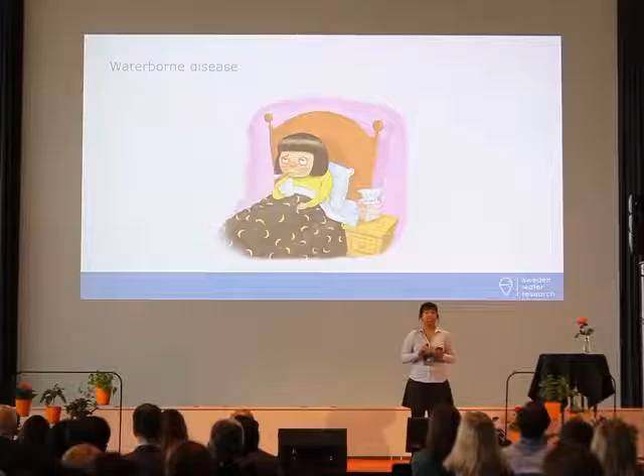And first thing, when I say I work with microbes, people think, wow, these are those things that make us sick. And when it comes to water, of course, waterborne diseases are one of the reasons why we should care about microbes in the water. I will give you 3 examples from different outbreak stories and see what we can learn from these 3 stories.

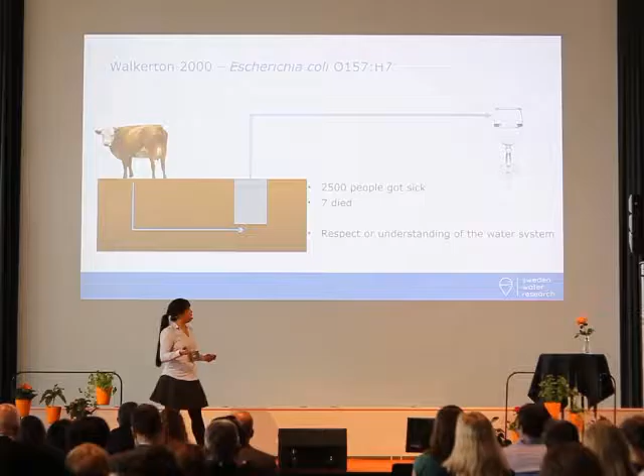The first one was in Walkerton, 2000. Walkerton is a city in Ontario, Canada, and had during this time around or less than 5,000 people living there. During this outbreak, 2,500 people got infected by this pathogen, and 7 people died. So what happened? How did the pathogen, in this case E. coli, EHEC, the pathogenic one, enter the drinking water system?

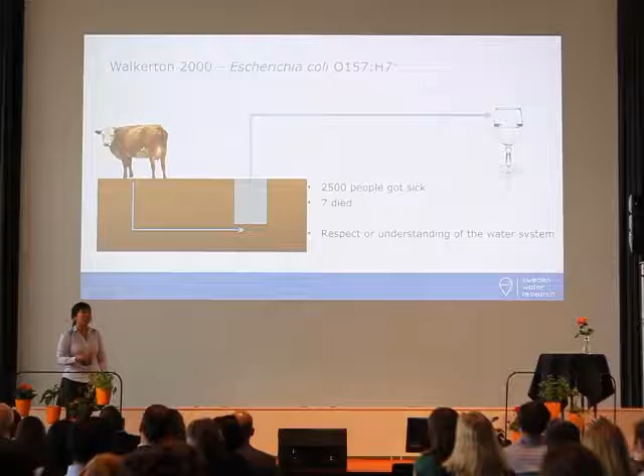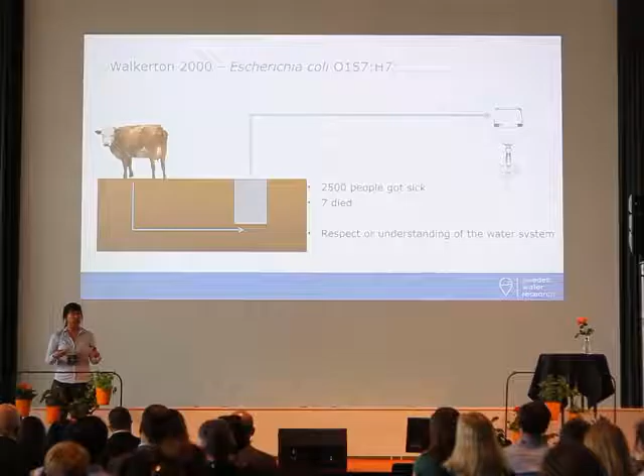So during this time, the contamination source came from a cattle farm. And it came due to a drinking water well that was located really close to this cattle farm. So the pathogen managed to enter the drinking water system by this well. It had already been reported since 1978 that this well, due to its location, was not suitable or should be monitored more closely for drinking water production.

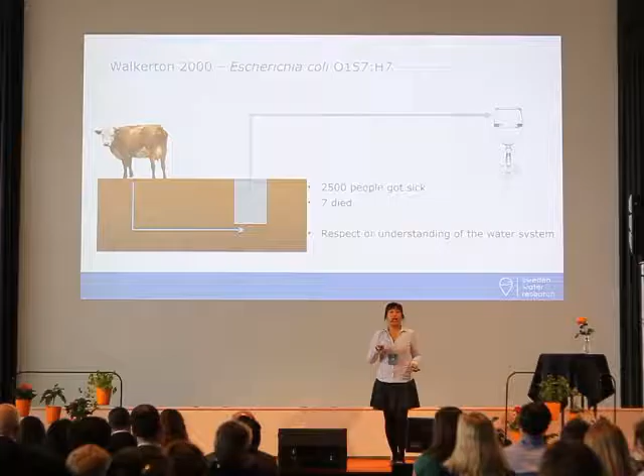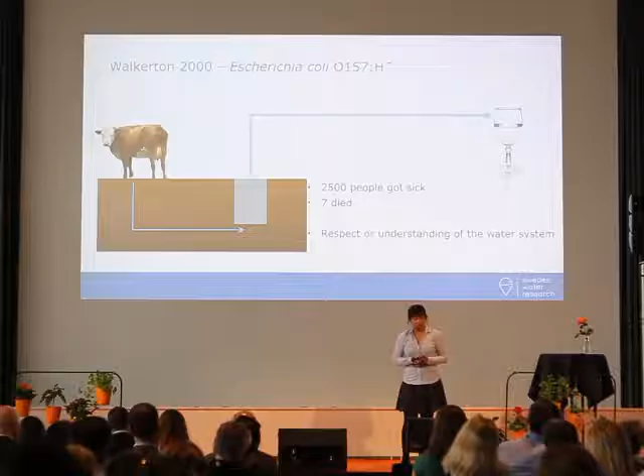Unfortunately, this was not followed, and this, in combination with the operators at the water supply not adding enough chlorine into the water, caused this outbreak. So this is really an example of how lack of respect and lack of understanding of our drinking water system can cause this huge consequence in a society, and also 7 people losing their lives.

It took 4 days from those phone calls before the government went out to recommend the citizens to boil their drinking water. And it took 4 more days before they were able to confirm that the pathogen, Cryptosporidium, had contaminated the source water and also all the drinking water in Östersund. Quite bad. And the government didn't remove the recommendation of boiling the water until 3 months after the outbreak. And that was after the installation of UV at the treatment plant and after a lot of flushing of the whole water system.

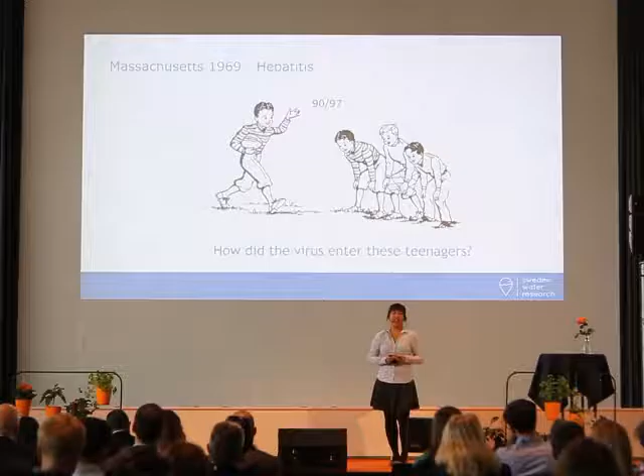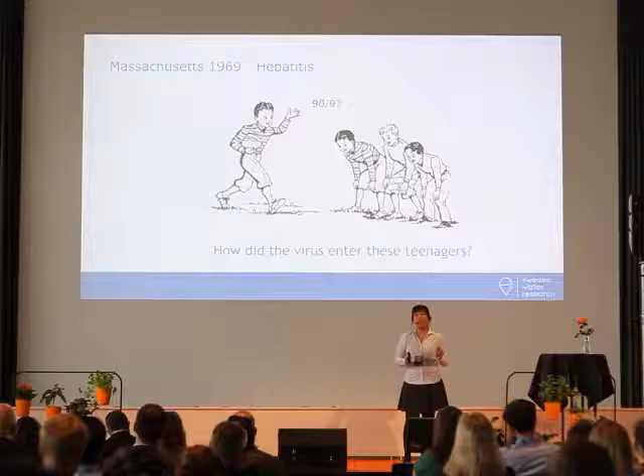My last story is quite interesting. It's almost like a detective's work. So in 1969, in a college in Massachusetts, 90 out of 97 football team members got infected by hepatitis.

They couldn't find any common source with other students on the campus, so they started to think it must be the training ground that is the contamination source. But how did this virus enter these teenagers by the training ground? That's really weird.

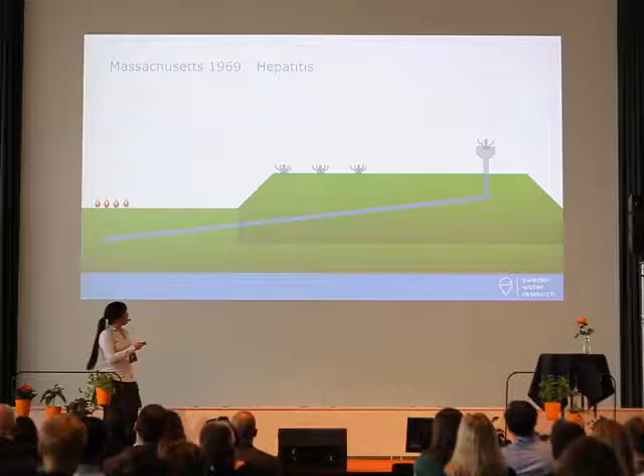This training ground was located at the top of the college area with a pipe system having its end there, with a drinking tap for the football team members. Along the way, we have some irrigation taps for the fields, and we also have a city down here. So what happened?

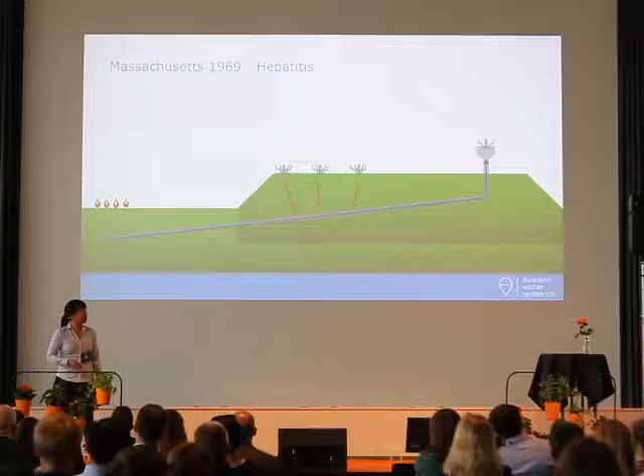It showed that some children with hepatitis had been playing close to the water from the irrigation taps, and almost during the same time, there had been a fire in the city.

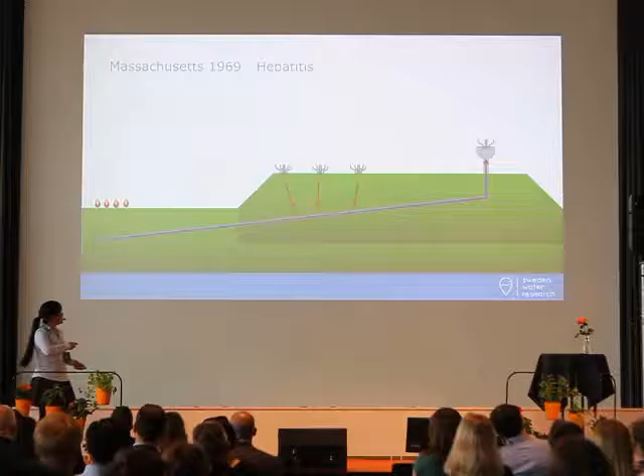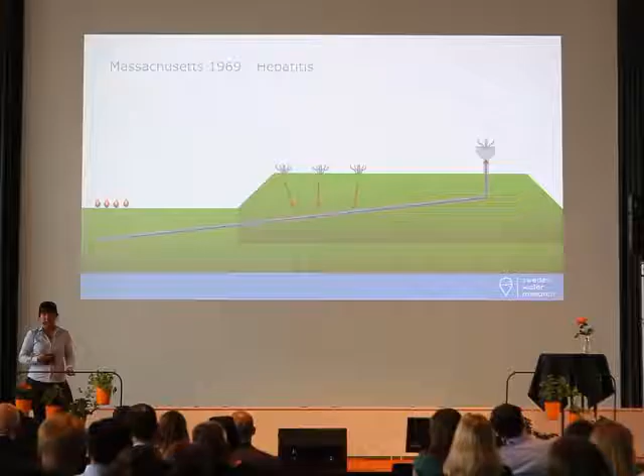This led to the conclusion that the children contaminated the water around these irrigation taps, and due to the fire, a negative pressure had built up in the pipe and drawn the contaminated water into the pipe system. So when the teenagers, the next day, had training and drank from the drinking water tap, the contaminated water had traveled to them in a very unfortunate way.

So these three examples show us how dangerous, how costly, and how complicated microbes can be in our drinking water.

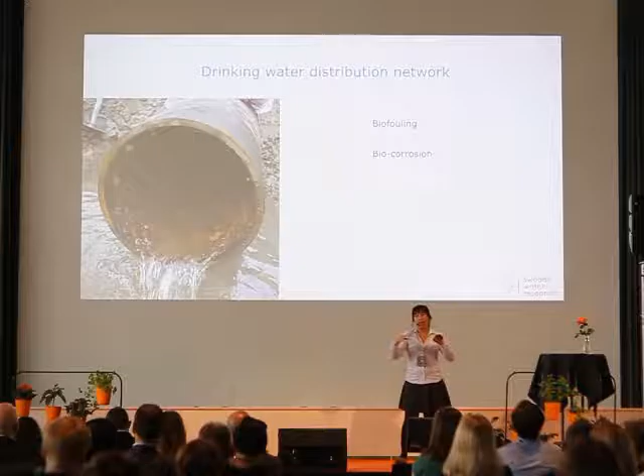But they can actually cause other kinds of problems too when it comes to drinking water. For example, in drinking water distribution networks, in pipes we have all kinds of microbes, and they can produce something called biofilm. It's a sticky material. We actually have that on our teeth when we wake up, before we brush our teeth. It can be a little bit sticky. That is biofilm. They can produce that in the pipe system too.

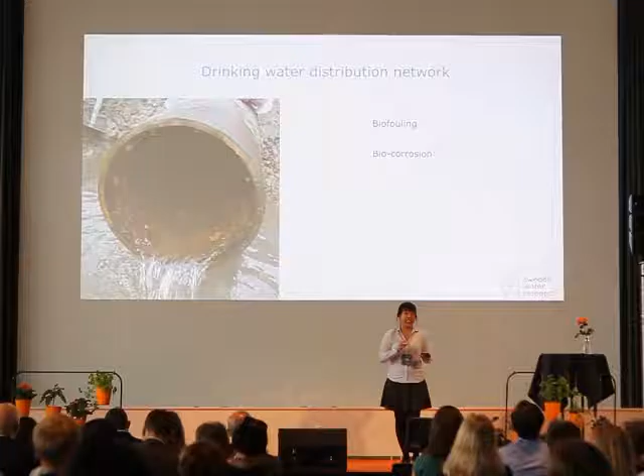And here, they can start to build a community and live and grow. They can grow so much that they can cause loss of flow rate, loss of pressure, and even clog the whole pipe. And some microbes in this biofilm, for example Ferrobacillus, can oxidize iron in the pipe material, causing it to leak.

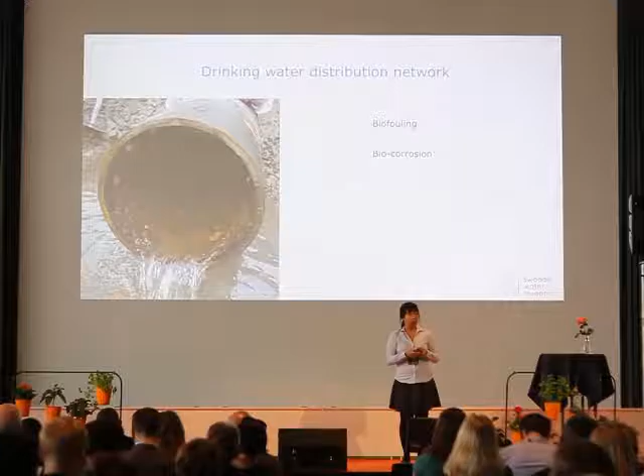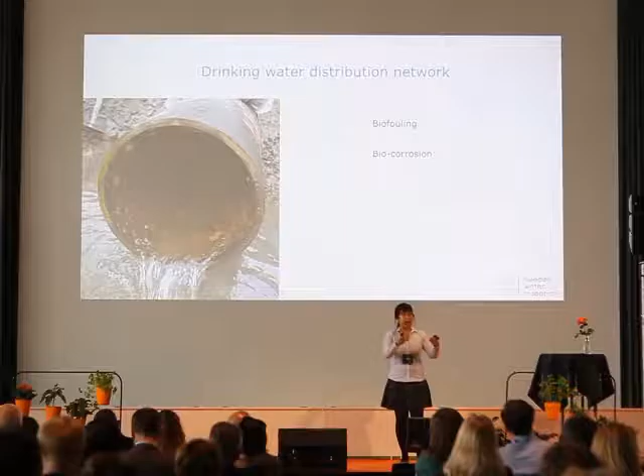There's also all kinds of microbes that can produce all kinds of acids. For example, sulfuric acid produced by bacteria called Acidithiobacillus can make the pipe leak. This costs a lot for society, to dig up the pipe and replace it. That's really complicated and costly.

So of course there's a reason for us to understand this world of microbes. Now I have been talking about the bad microbes in the water, the pathogens that can make us sick, and also the spoilage microbes that destroy our pipe system. But the majority of the inhabitants in the water are actually not pathogens, and they are not spoilage microbes. They are the so-called natural flora in our drinking water.

I will give you some numbers. For example, in a glass of water, we have around 1,000 to 100,000 bacteria per milliliter. In Lund, we have around 200,000 bacteria per milliliter, and that is quite a lot. That is around 40 million in a glass of water, which corresponds to almost all the people living in Spain, the country Spain, in a glass of water.

That is the world we are talking about. And when it comes to a distribution network, that is even more. On the pipe surface, we have around 100,000 to 100 million bacteria per square centimeter. That is a lot.

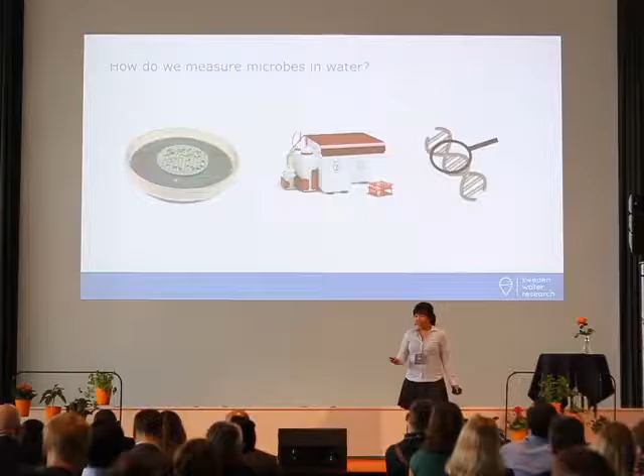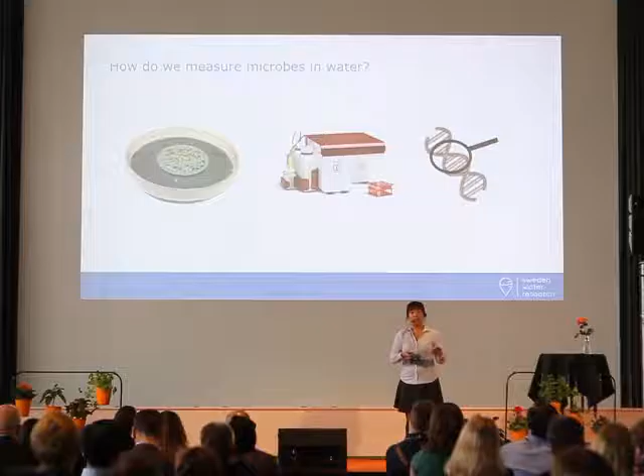I will give you three examples. This one is plate count. It's over 100 years old. You just add your water samples in there and let it grow for some days.

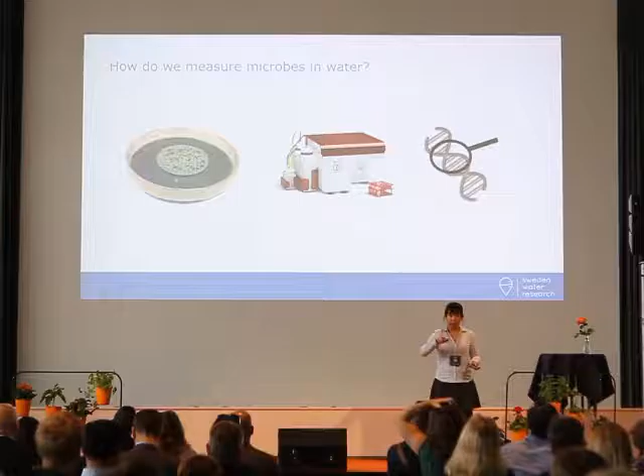A newer method called flow cytometry counts all the bacteria in your water based on DNA, no growing, just DNA. Then we have a third method, very modern and complicated, called next generation sequencing, where we sequence all the DNA in a sample to get the name of the whole flora.

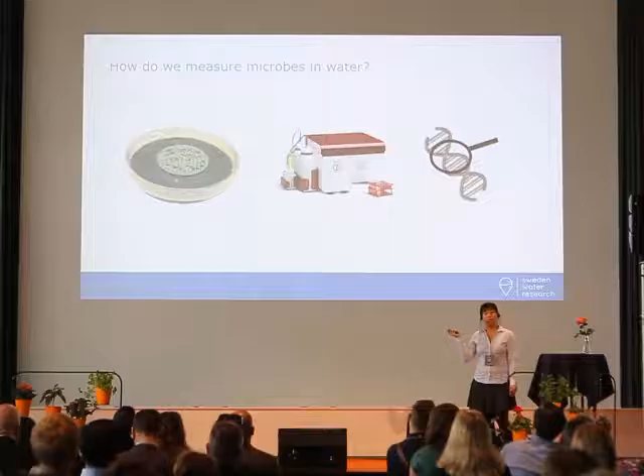Which method do you think all the regulations are based on? Yes, this is a leading question, but yes, plate count, the method that is over 100 years old.

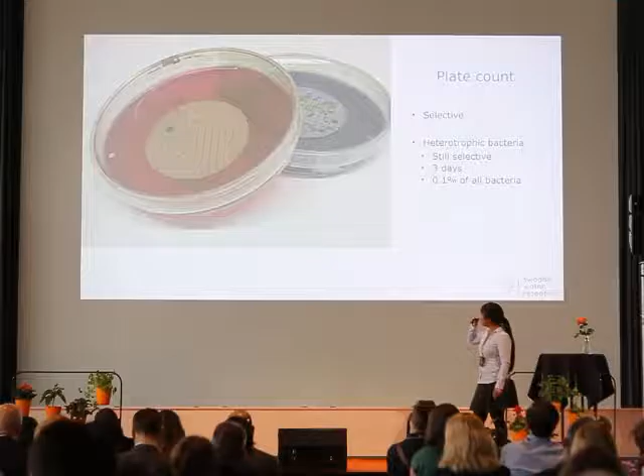Let's talk a little more about them. These plates are actually from my lab, also called MCF plates. Here we can grow and select E. coli and coliforms. The blue dot here is an E. coli, and the rest are coliforms.

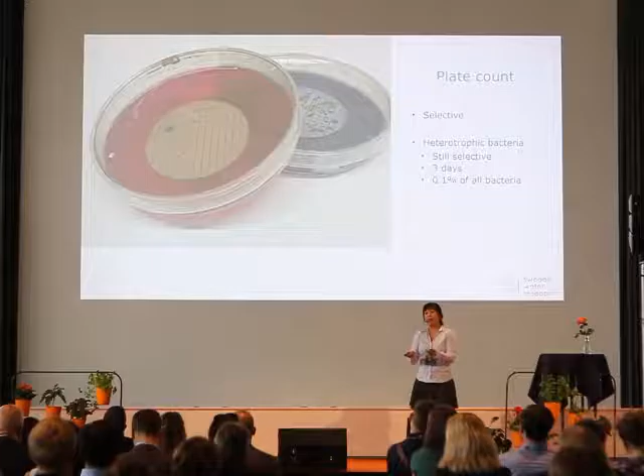So with this method, what you do is give food and nutrients to the group you're interested in following, then incubate it at a temperature they like, in this case 37 degrees, and then wait and count how many have grown from your sample.

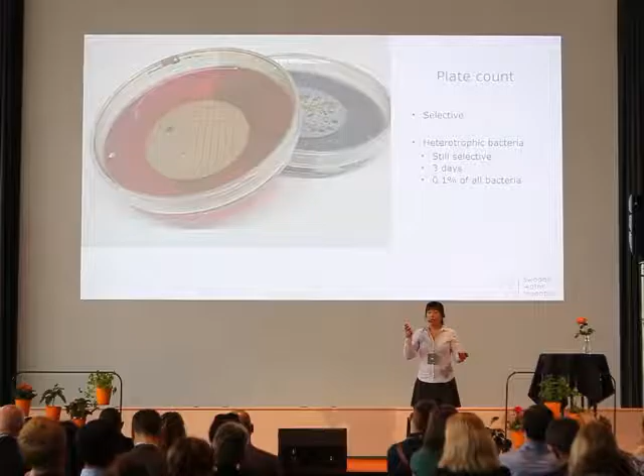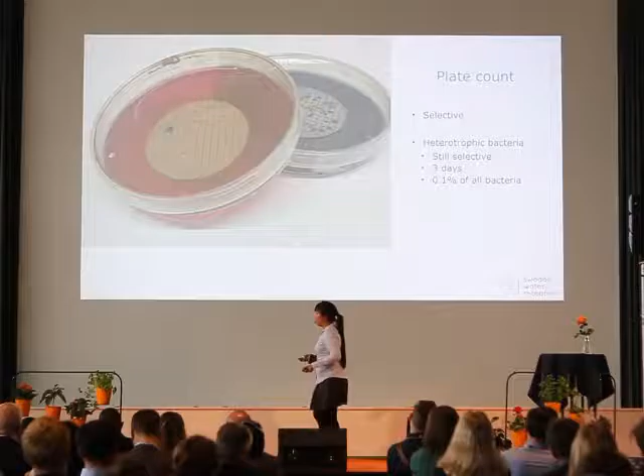When we talk about the natural flora, the whole flora, and want to measure that, we reach the limit of this method because we always have a selection. The closest you can come to measuring the whole flora with plate count is to measure the heterotrophic bacteria. The standard method is to grow them at 22 degrees, which is itself a selection.

For example, here in Sweden we almost never have 22 degrees in our water, and we also select bacteria that like to live on surfaces instead of swimming around in the water. So you lose quite a lot. Studies have shown you can only measure less than 0.1% of all bacteria in your drinking water when you use plate count.

So to not limit ourselves in our lab, we use DNA methods. We don't grow - well, we do to compare, but we don't use it so much. We use DNA, because all bacteria have DNA.

So the two first methods, next generation sequencing and qPCR, here we measure one specific gene, the 16S ribosomal RNA gene, which we use for taxonomic determination of bacteria. That is quite common. And here, since it's DNA, we can measure all of the bacteria - we don't select, we don't have a growth step, just the DNA.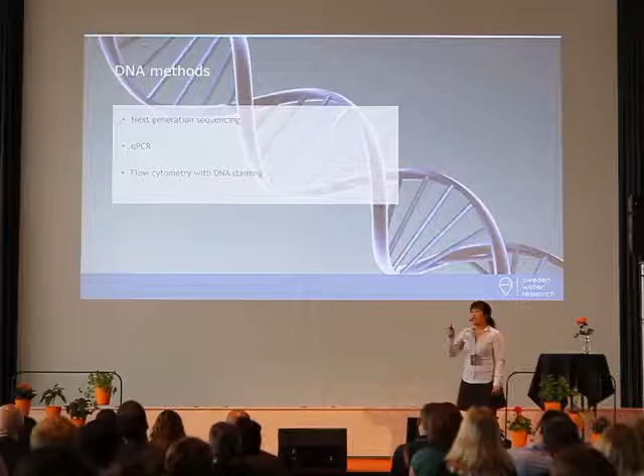The third method, flow cytometry with DNA staining, is quite different compared to these other two methods, because here we measure the DNA inside the cell directly, which means we don't need to extract the DNA, which is costly and complicated to do.

So let's go deeper into this method. We start with qPCR. Here we want to measure the 16S rRNA gene, which every bacterium has.

So what we do is take the extracted DNA. We split it by just heating it up, and the DNA strand falls apart into two single-stranded DNA. Then we add something called primers - small, single-stranded DNA strands that only bind to the 16S rRNA gene. It can only bind here. So now we have a tiny part that is double-stranded.

And here our enzyme can start to bind and copy this strand. It goes to this nucleotide - let's say this one is an A, then it will add a T. Next one is a G, then it will add a C, and so on. It will make a lot of copies of this specific double-stranded DNA we're interested in.

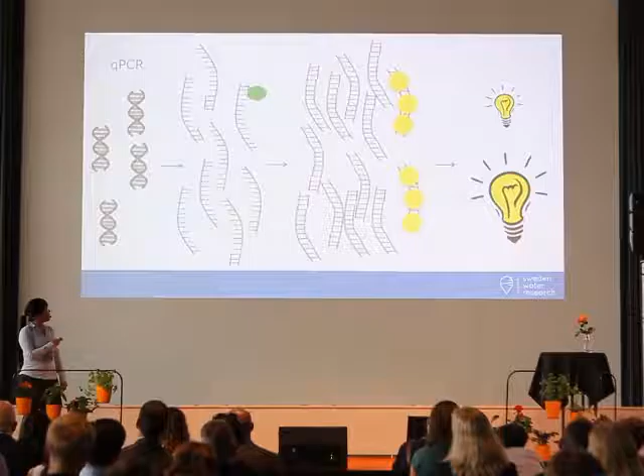This enzyme is actually quite similar to an enzyme we have in our body that we use to copy our DNA to produce new cells. It's the same mechanism, but we just apply it in the lab.

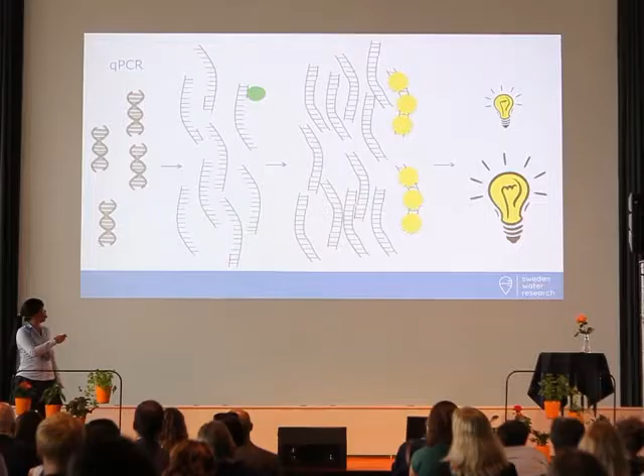And then we add fluorochromes that bind to the double-stranded DNA and give us light - it will fluoresce. So when we have a sample with a lot of bacteria, which means a lot of this 16S gene, we will get a lot of double-stranded copies, and we will get a lot of light.

And when we have a sample with less DNA, less bacteria, we will have less light. And you can also tweak this method a little bit.

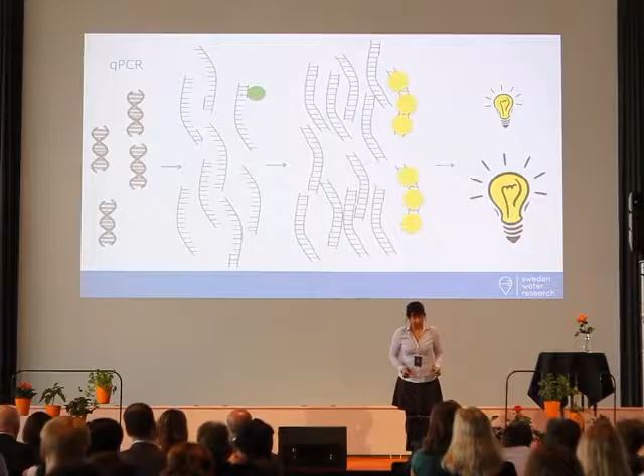You don't need to measure the 16S rRNA gene to measure all the bacteria. Right now in my lab we are developing another method, which targets another gene called MLRA. You don't need to remember that, but this gene encodes an enzyme capable of degrading algae toxin. So then we will have a method that can measure bacteria that can degrade algae toxin, for example.

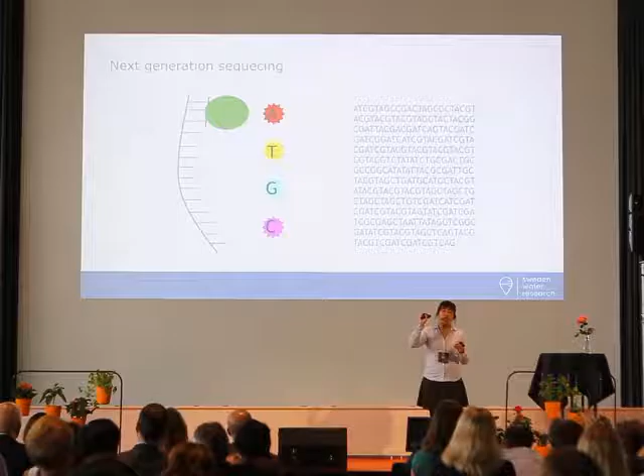The second method we use is next generation sequencing. It's actually quite similar to qPCR, coming from qPCR. But instead of having this fluorochrome that binds to double-stranded DNA, we have the fluorochrome attached to the nucleotides, and each nucleotide gets its own color. So A gets red, for example, and T yellow, and so on.

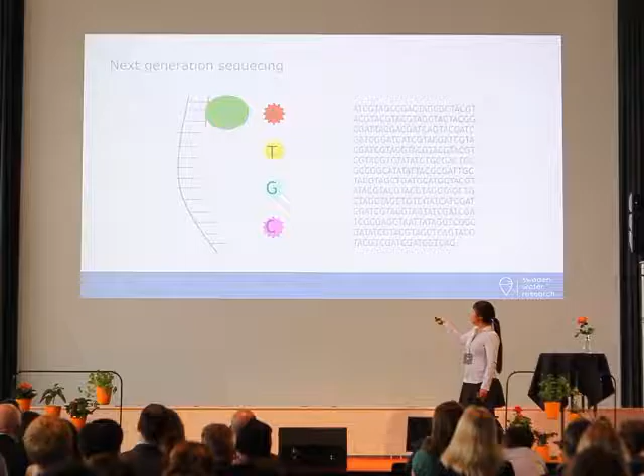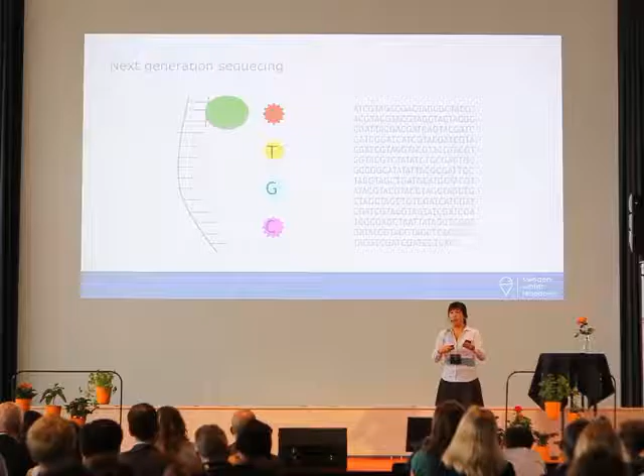So when the enzyme comes and starts to add the nucleotides one by one, it will give light. First, if it's an A, it will give a red light, and if it's a T, it will give a yellow light. We measure that, so then we know the order of the nucleotides coupled to the DNA.

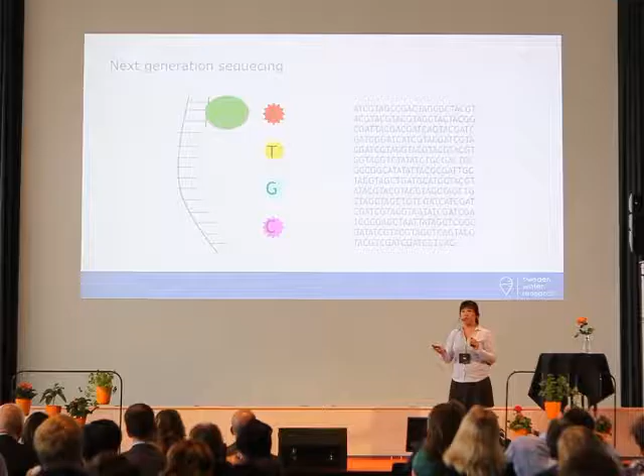So the raw data will look something like this - this is the DNA, basically. And then you need some bioinformatics and computer skills to translate this to the bacteria name. This is done for all of the bacteria in your sample simultaneously, so you get a lot of data, but therefore you get the whole natural flora.

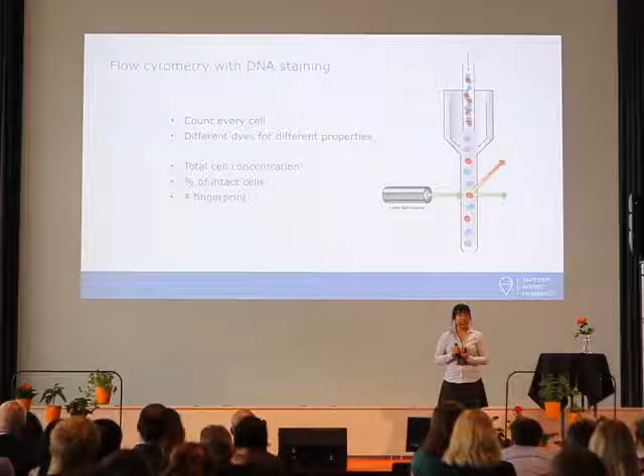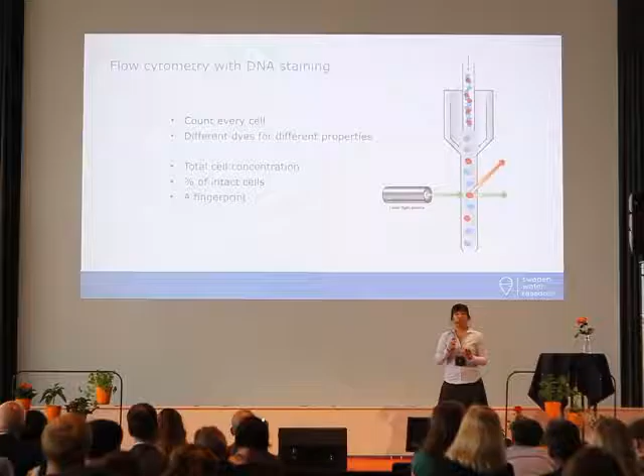The third method we use is flow cytometry with DNA staining. This method is, compared to the other methods, really fast - you don't need to extract DNA, and it's really easy to use and doesn't cost so much except for the machine, of course. You don't need to have so advanced computer skills, and you can run it quite easily.

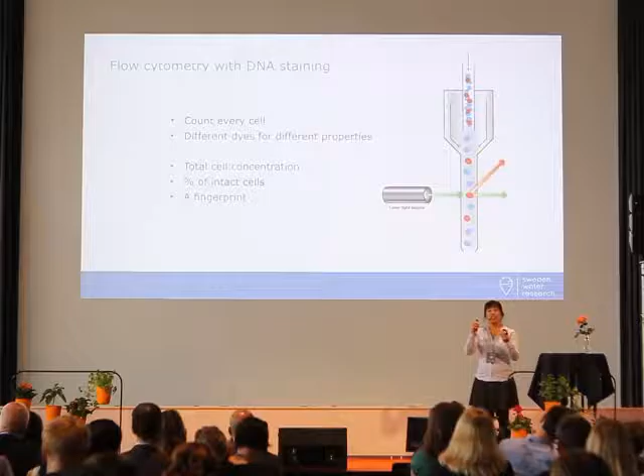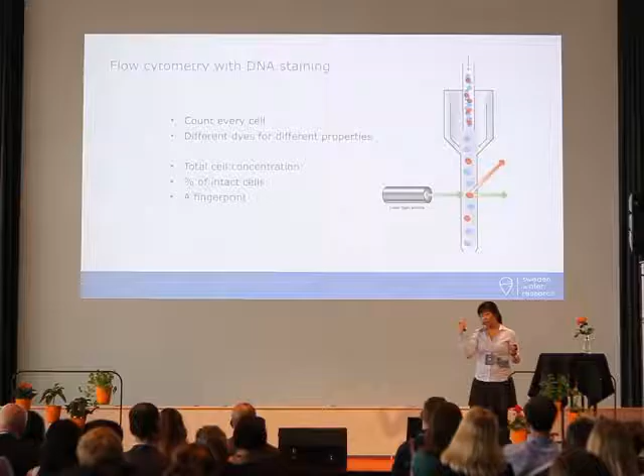So instead of extracting DNA, we stain the DNA with the fluorochrome. What the flow cytometer does is actually analyze one cell at a time in a flow, and measure the light that comes out from the fluorochrome, from the bacteria, simultaneously all the time. It's really quick - from sampling to results, it takes only a few hours.

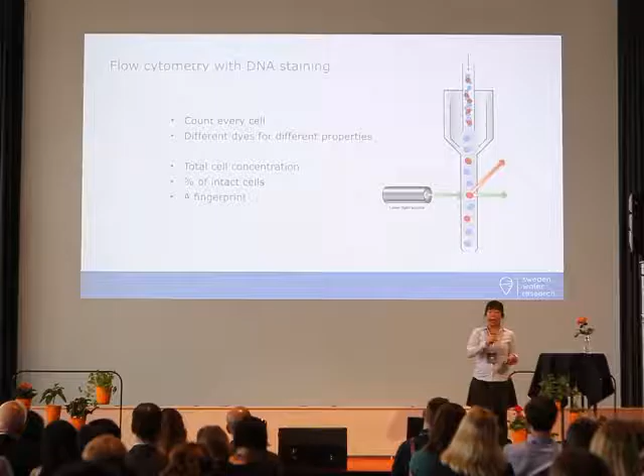At the treatment plant here today, close by, they use heterotrophic plate count, the one I talked about before. That one takes 3 days - the incubation time is 3 days, so they need to wait 3 days before they know if this water is okay or not.

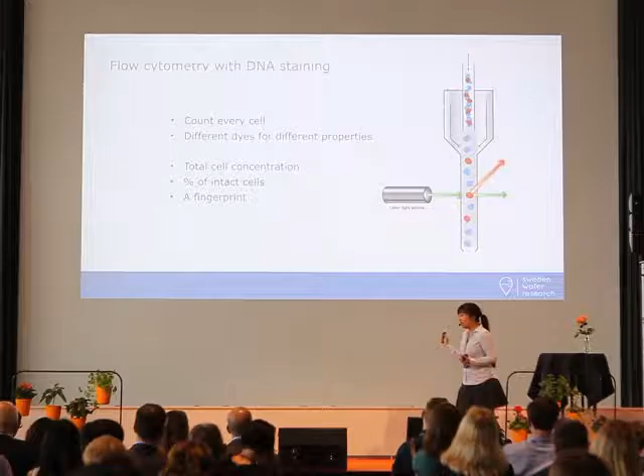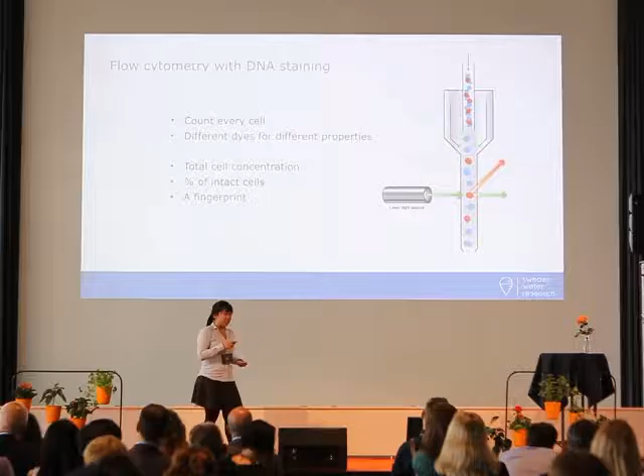Compared to this method, that first of all measures all of the bacteria, not only the 0.1%, and secondly takes only some hours. So this is really a method you can apply in the industry, and that's what we have done through the collaboration between Sydvatten and Lund University.

So let's use this method to go through the local drinking water system here west of Skåne. Oh, I forgot this slide actually.

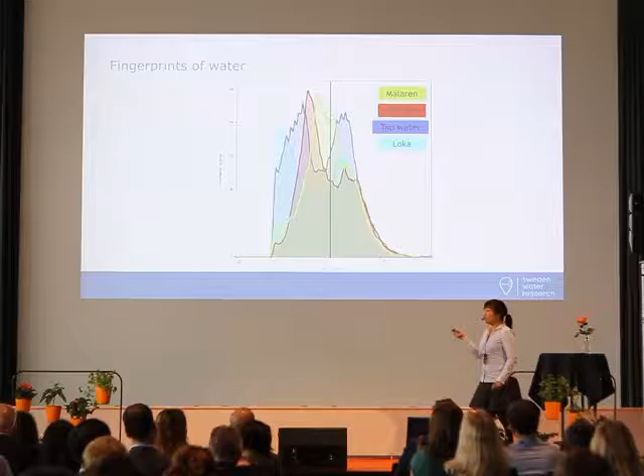4 different water samples. The yellow one is from a lake called Mälaren here in Sweden. The red one is a lake called Bolmen, also in Sweden. The blue one is the tap water here in Lund, more specifically from Kemicentrum at Lund University, where I have my lab. And then we have the light blue one, which is from a bottled water from the brand Loka here in Sweden.

So you can see that each water sample has its own fingerprint. And it's actually not so complicated - it's just the distribution of the DNA we have here for each bacteria in the flora.

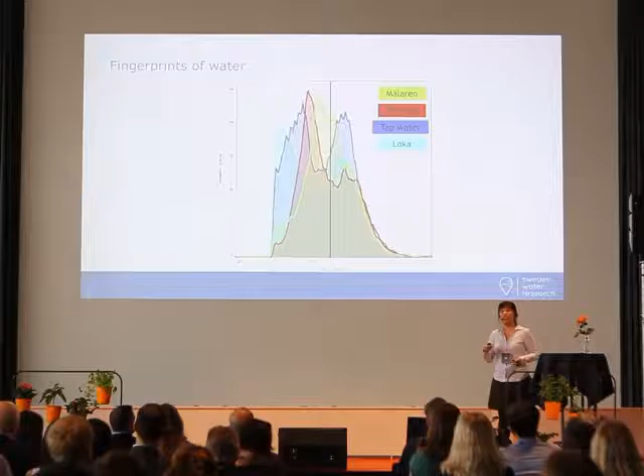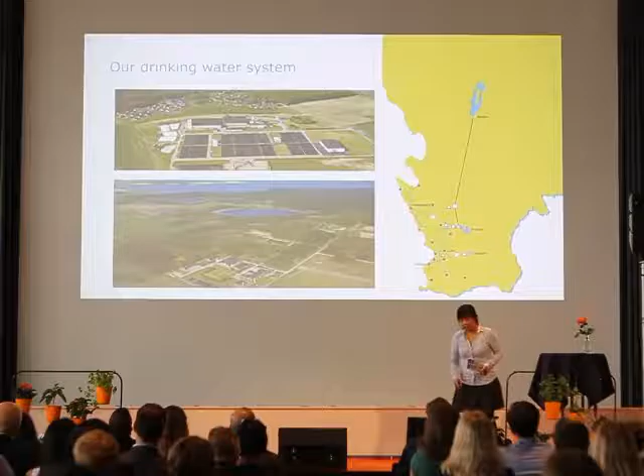So bacteria on this side has a lot of DNA in it, the so-called high nucleic acid group of bacteria. And on this side, we have bacteria that doesn't have so much DNA in it - it's called low nucleic acid bacteria.

So let's use this method to go through our drinking water system. Sydvatten has 2 source waters that they use, and also 2 drinking water systems.

We have Lake Bolmen, which we take our source water from and transport it by a tunnel into the treatment plant called Ringsjöverket, which you can see here on this picture. And then I will stand here instead. And then we have another lake called Lake Vomb, which is here, that we take source water from into the treatment plant called Vombverket. And this is the picture of Vombverket. Here is Vomb Lake.

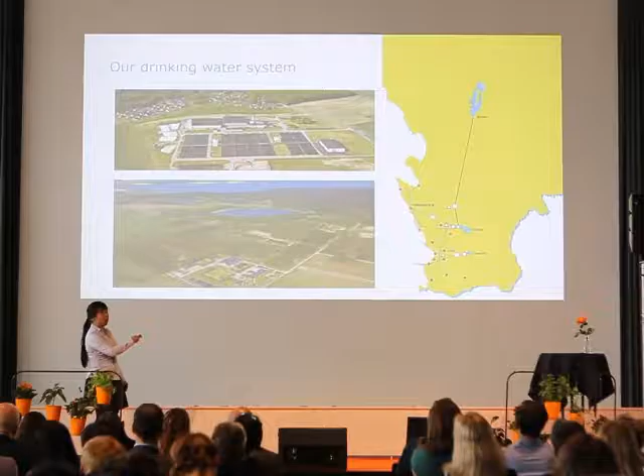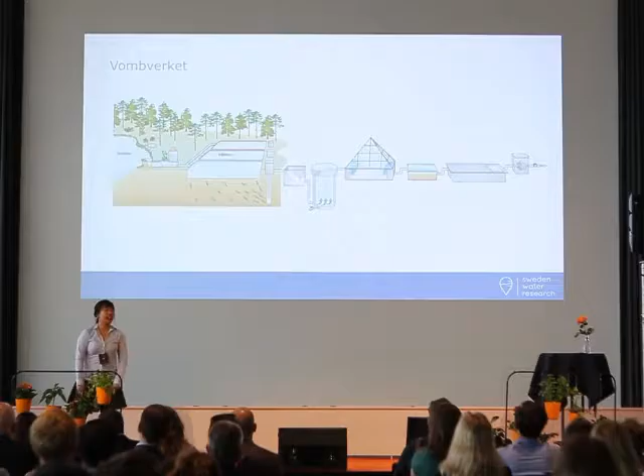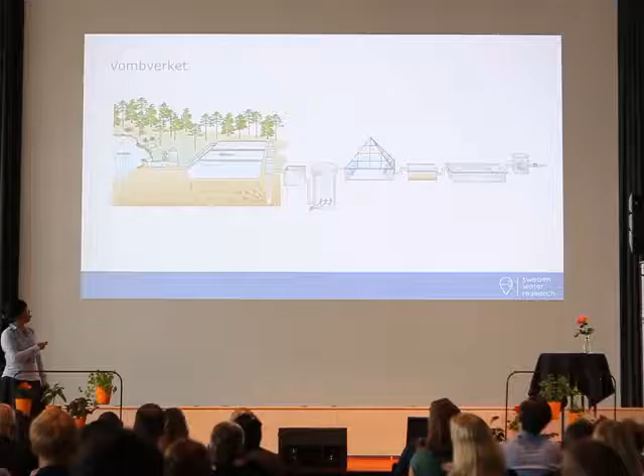So it's huge. So this is the process line of Vombverket. We start with the source water, and then we pump it into something called infiltration ponds, which is also called artificial groundwater recharge. So it's a biofilter. And then the water goes through these filters, goes through the ground around 60 meters, and then we pump it up again into the actual drinking water plant. We have some aeration, we have some softening step, flocculation, a rapid filter to remove the flocculant particles, and then we have a water reservoir where we add chlorine before we pump it up to the consumers.

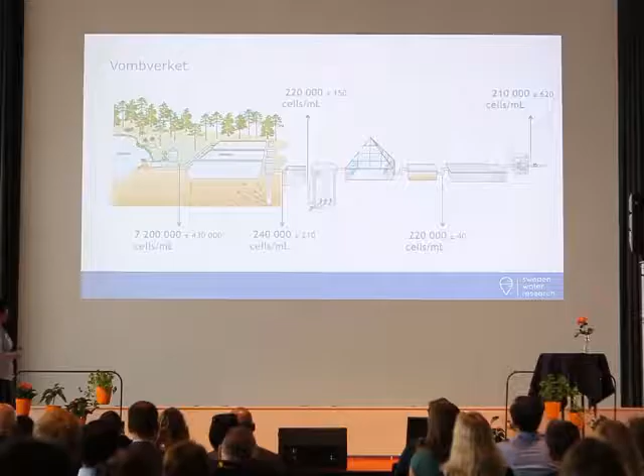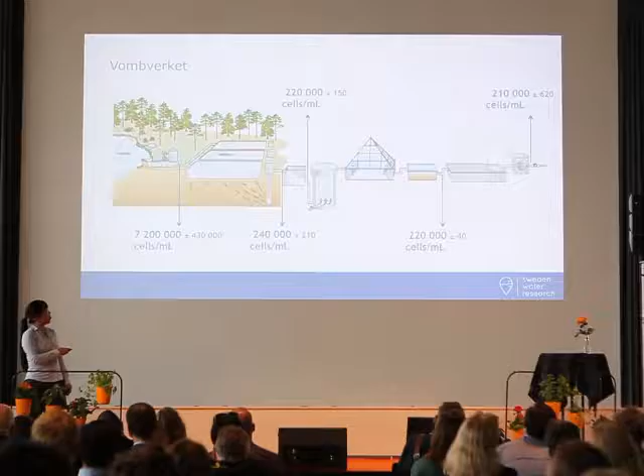So we went to this treatment plant and went through it with flow cytometry because it's so rapid, and then we see all the bacteria in our drinking water system at this treatment plant. So we start with, so many zeros, 7.2 million of bacteria into a treatment plant. That is what we have to deal with. And then after the infiltration step, we only have 240,000 left. That's quite impressive. And then, nothing really happened with this number. It's quite stable out. And as I said to you before, it's also the same number in a tap. It's around 200,000 bacteria per milliliter.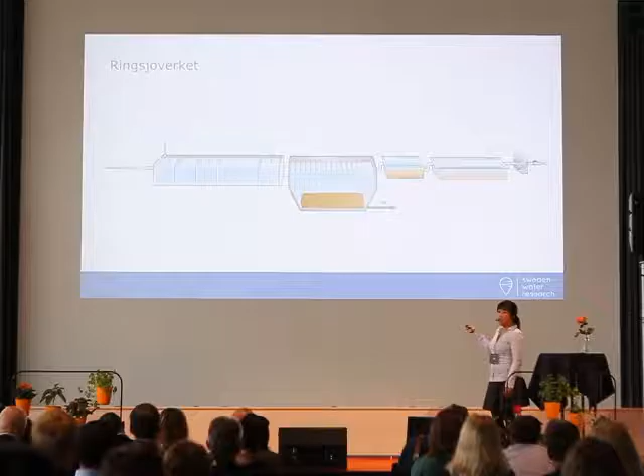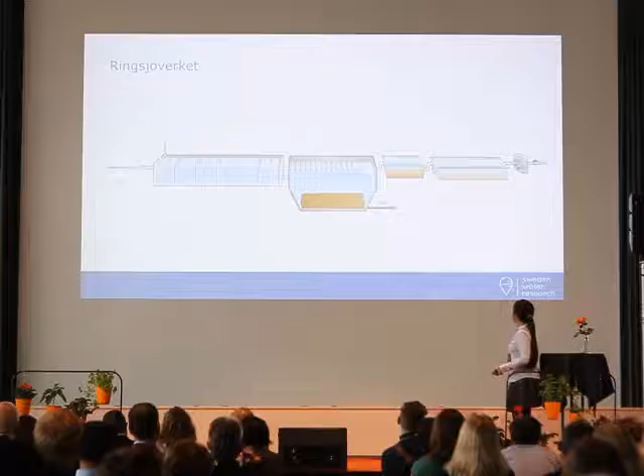If we go to another treatment plant, this is Ringsjöverket, which is the one that produces most of the drinking water for us here today. It looks different. We have flocculation first, and then we have some lamella sedimentation to get rid of the big particles, and then we have a rapid filter to remove the small, fine floc particles. Then at the end we have a biological filter again, but these are called slow sand filters. And then we pump it out. Or we add chlorine, and then we pump it up.

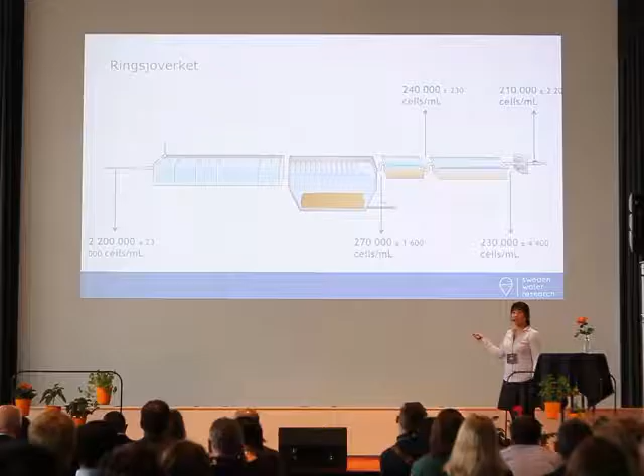So this is the count. We start with less, actually, only 2.2 million cells per milliliter, compared to 7.2. Maybe the tunnel is actually doing something. We are not sure. And then we have a drastic reduction after the flocculation to only 270,000. And then it's decreasing a little bit, but not so much, to only 210,000 going out to the distribution network.

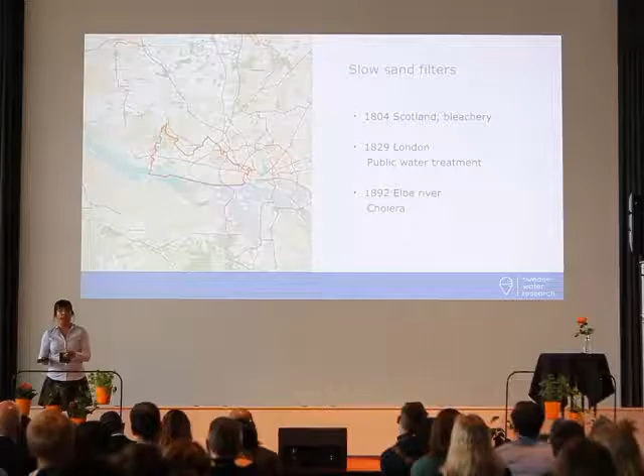So I want to introduce slow sand filters by history. So slow sand filters were first used in 1804 to actually produce water for a bleachery. And then the leftover water was later sold to the people. And it was not until 1829 slow sand filters were used for production of public water in London. But during this time, we didn't know anything about pathogens and microbes and this kind of stuff. We only knew that slow sand filters are good because they can remove particles from the water. That's it.

It was not until 1892 we first saw the full potential of slow sand filters. During this time, we had two cities, Altona, in this red square almost, and Hamburg. These two cities took the drinking water from the river Elbe.

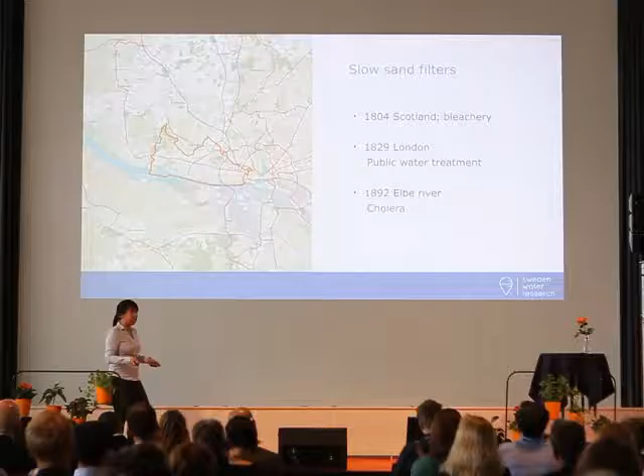And Hamburg didn't really have any treatment step, it only had sedimentation, compared to Altona that filtered all the water from slow sand filters. And when this river got contaminated by cholera, 1/3 of the population in Hamburg got infected, and around 8,000 people died. And all the people in Altona managed to escape this tragedy almost unharmed. The year after, Hamburg installed slow sand filters.

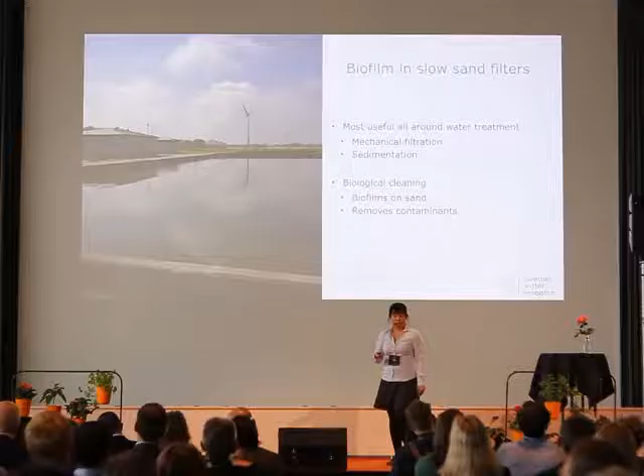So I show you that slow sand filters can be really useful, and it's still the most useful all-around water treatment step. It has some mechanical filtration, it has sedimentation, but also the most important one, biological cleaning, which is the biofilm I talked about before. Now we are using it. It's on sand particles, and this biofilm can remove all kinds of contaminants from our drinking water. It can remove organic matter, nitrate, pathogens, phosphorus, and you name it.

What we do is that we empty the water, scrape off 5 centimeters of the sand, and then we add the water again. And then we use it again. Quite easy. But this is a disturbance for the biofilm, for the community living in the sand. And we wanted to see how this affects the slow sand filters. So we took 3 slow sand filters that were quite different from each other. They are different because of some other parameters, actually.

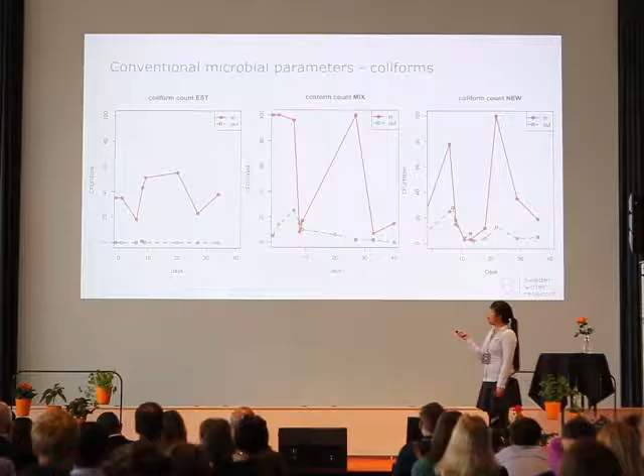This one is a new one with only new sand. We bought it from somewhere else in Sweden, put it in a basin and started to use it. And then this one is another one that had mixed sand, new sand like this filter, but then we added some old washed sand, mixed it and put it in. And we compared these two with one of the well-working slow sand filters that only had old sand that had been running over 20 years.

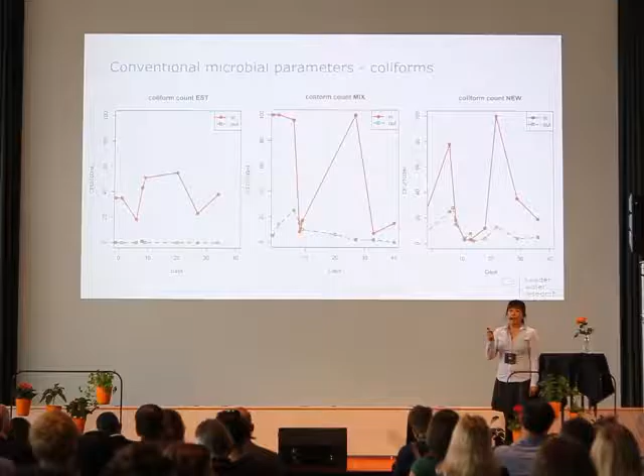So we started to look at them with the conventional microbial parameters, which is plate count. And this is coliforms we're looking at. Coliforms is an indicator organism. They are by themselves not pathogenic, so they're not harmful, but if you have them in your water, it's an indication that you have a contamination from either wastewater or ground or rainwater or birds. That is usually our problem, because the slow sand filters are open, so the birds like to swim there and play there, unfortunately.

So you see, the red one is the ingoing water, which is open. So sometimes we have some increase of this group of coliforms, which is a warning system, not good. But the outgoing water for the well-established one is always 0. Somehow this filter managed to just remove this group of bacteria. And when we compare that to the 2 other filters, it looks different. These 2 new ones are not behaving so well.

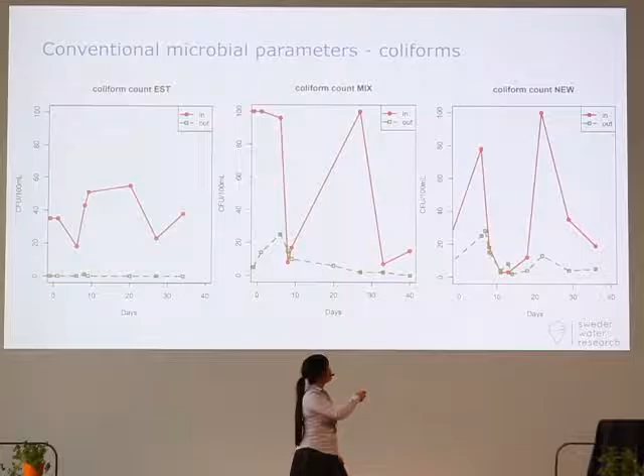You see, when we have an increase in the ingoing water, we also have an increase in the outgoing water. The green one is the outgoing water. And it's even worse for the new one here. You really see a peak here in the ingoing, and then you see a peak in the outgoing. Somehow this filter is not able to do this shift, like this one.

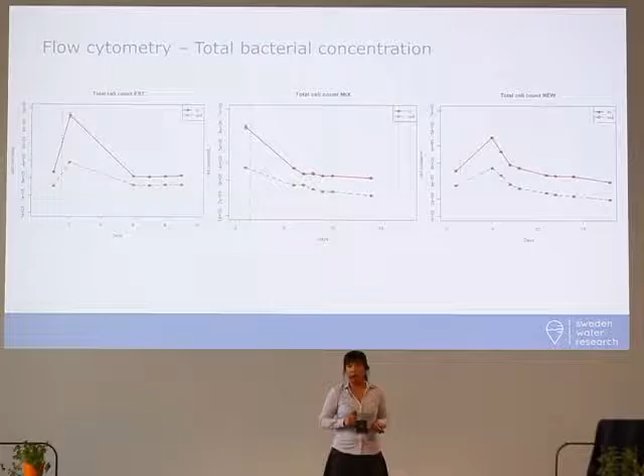So we followed that with flow cytometry to see, can we see that in flow cytometry? We can't see it by count. You see these 3 just look different, but not more than that. And so we use the fingerprints. But instead of just looking at it by eye like we did before, we use some computer skills and computer tools to look at it in a more statistical way.

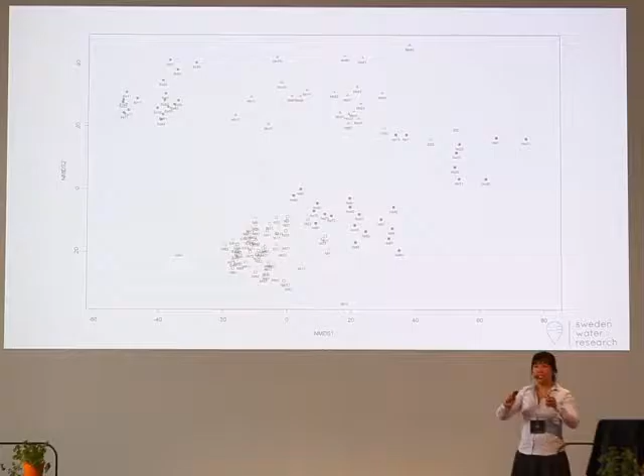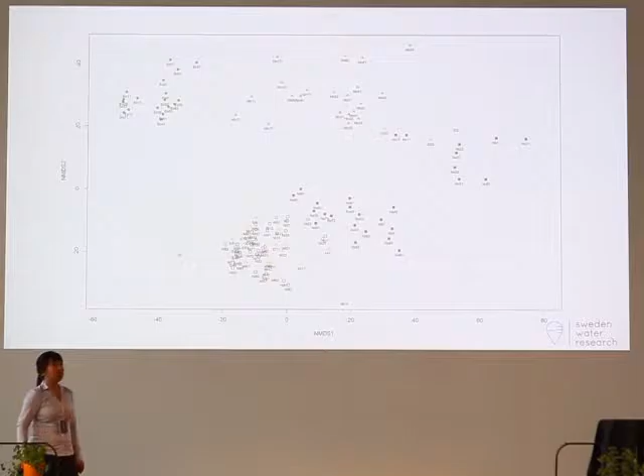So we see here that the well-established one managed, although we wash it, to produce the same natural flora all the time. So the cluster is quite tight. Compared to the one that had mixed sand, it's more spread, meaning that it's not stable, it's changing the natural flora. And this one is even worse, because what you see here, this is the beginning of the washing, and then at the end, it ends here, which means it's actually more close to the ingoing water than the other outgoing water. This is what we can see in flow cytometry.

And due to its potential, flow cytometry, many drinking water companies have been really interested into this, and Sydvatten is really happy to actually have this data over the treatment plants. And I'm really happy to say that we are going to have a workshop and also a training session with many drinking water companies coming from Stockholm, Linköping, Varberg, to visit our lab.

We will open up the lab for them, and we will teach them flow cytometry, because they really want to implement this fast and rapid method into the treatment plant. And that's what we are going to do. And it's due to research and industry. That is due to this collaboration.

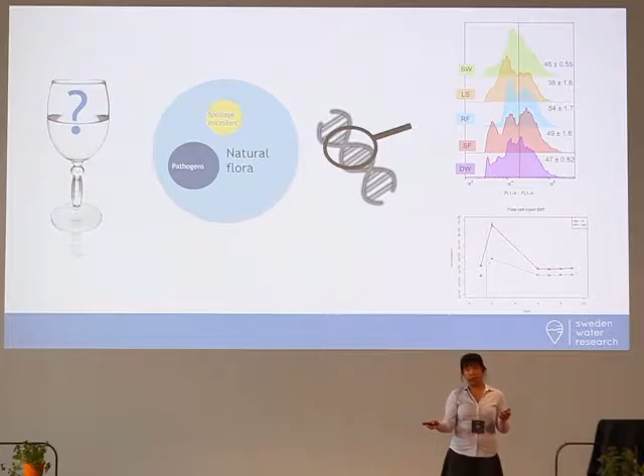So I have 1 minute. So I would like to summarize the whole session. We started to discuss about clean water, what is clean water, and I gave you some outbreak stories about the football team, for example. And then we started to talk about the natural flora instead of the pathogen and spoilage microbes. And then we discussed a method on how to measure these natural flora. And I showed you some methods, and we focused on flow cytometry, and we saw how we use it to go through two different treatment plants, and also how we studied slow sand filters with it.

And I would like to end my presentation with a take-home message from this masterclass, and that is that microbes are invisible, yes. They are small, yes, but they play a really important role when it comes to drinking water. Thank you.

You need to stay. Yes. Thank you, Sandy, and let me try and understand you better by asking you this simple question. Would you drink it? Yes, of course. So there's a whole world in there, but it's a world that we should encourage and embrace.

I wanted to also ask you to widen the picture a little bit. We have the 17 new global sustainability goals that the whole world is supposed to reach by 2030. Number 6, and perhaps the most important, and the one that we've been discussing this morning, is to ensure access to safe drinking water for everyone. Are we going to get there? Yes, we are, believe me. I'm a little bit young and naive, yes I am, but I really believe that by working together, we can reach that goal. We have the skills, we have the knowledge, almost, but we can together do that.

That's such great news, because right now, you know the biggest airplane there is, the A380 that's bigger than the Jumbo Jet. Imagine filling that plane twice with kids, 2 planes every day, and then you crash them. That's how many kids die every day from waterborne diseases. So we're a bit off, but we're getting there step by step. And what do you think that we, as a community, as diverse as we are, should do to accelerate this? We need to collaborate. And that's what the bridge is about.